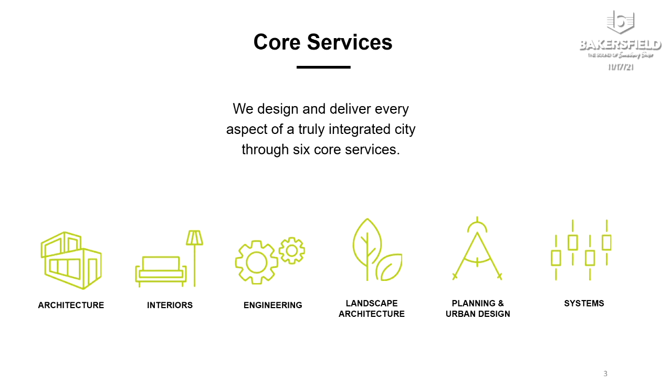Some background about them: IBI Group is a global organization doing projects all over the world. They're essentially urban planners and other design professionals. These are their core services. As you can see, we implemented and used all of these except, I would say, interiors. There wasn't any interior design work per se, but pretty much all the rest of these disciplines were used in the master plan. This is just a list of some of the resources they have available and the various disciplines they practice in.

And this is the team, the IBI team that worked on the master plan. The core team—we have with us today Dave Nicholas, who is the lead on the project and the project manager for the master plan, as well as Joe Clark, architect, and Jen Moore, who is an urban designer and licensed landscape architect. And with that, I want to introduce Dave to come up and take it from here.

Thank you, Stuart, and hello, Mayor and members of the Council. It's Dave Nicholas, IBI Group. It's a pleasure to see you. Thanks for the time today. We'll try and be brief. I wanted, on behalf of Jen and Joe and myself and the entire IBI team, to say thank you.

Thank you for the honor to participate in this process. It's been phenomenal. It's hard to believe we've done it entirely under COVID protocols, but that's a testament, I think, to the city staff, their endurance, their dedication, and our ability to have meetings technologically and virtually. It's been a tremendous process. We wanted to mention this is an amazing investment you're making in your community with this process. Streetscape enhancements are typically looked at as beautification, maybe not critical, but we see this as very critical to the livability, the economic vitality, and the image and identity of the city in the long term. We believe this document and this master plan lays out the groundwork for that to be applied over time.

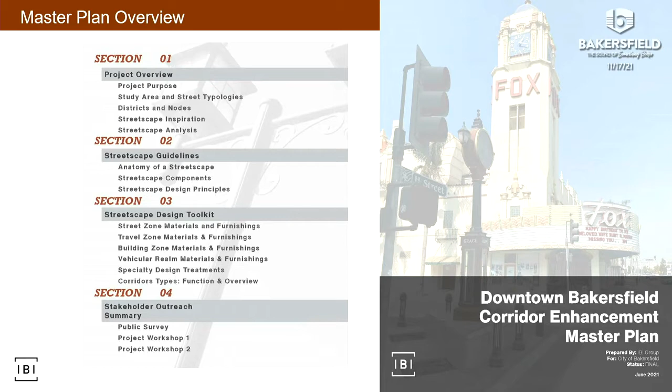The overview is what it is, but sections 2 and 3 are really the guiding principles as well as the toolkit we want to move forward with. Again, this is an abbreviated presentation of the information in the document itself, but the purpose really is a continuation of the Making Downtown Bakersfield vision. This is an outcome of that, and it's a next step in the image, identity, beautification, and corridor enhancements of the downtown area.

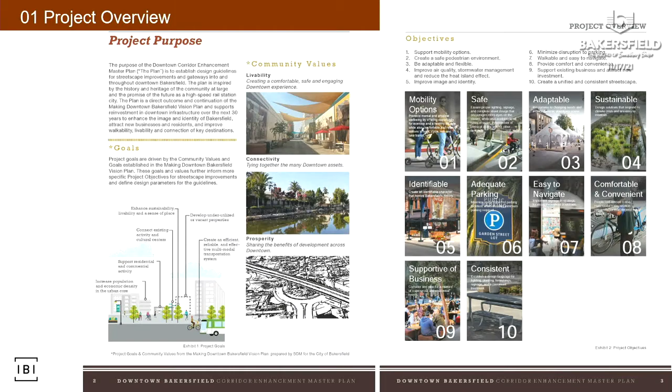So the goals and the community values that were established in that Making Downtown Bakersfield project are the leading, guiding goals and objectives of this project. And then we dove deeper through workshops and staff input and defined project objectives for this particular project. Those range anywhere from comfort and convenience to consistency and so forth.

We also leveraged that Making Downtown Bakersfield plan to emphasize and continue to look at this idea of districts and nodes in the downtown area. Those are emerging, and they always will over time, but that's important to recognize. You can let the streetscape and corridor enhancements actually reflect these districts and nodes, and they can take on a special character in those particular areas.

There's inspiration behind this to make this Bakersfield. So the heritage and history of the community is really brought into the design components in selecting materials, standards and patterns and so forth. The music, the agricultural, and the railroad history is all brought into this and is reflected in some of the guiding standards and objectives, as well as the applications.

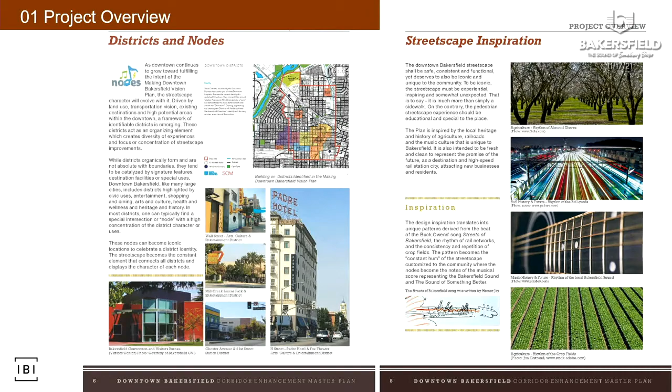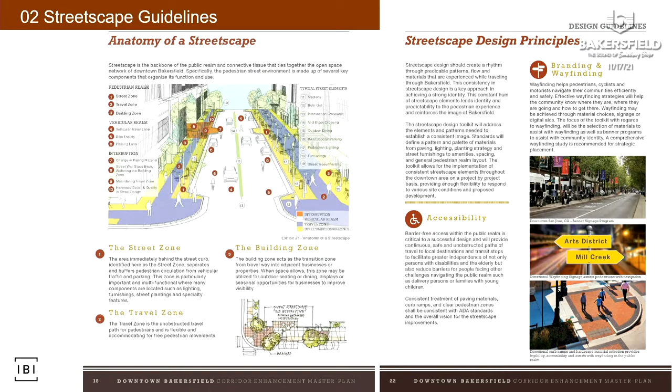Section 2 is really about guidelines. It defines the anatomy of a streetscape. It's not just the sidewalk, we know it serves so much more. When we boil it down and simplify it into a street zone, travel zone, and building zone, just to make it as simple as possible to understand. Then we define each one of those, what goes in each, and what the principles are behind each one and the functionality.

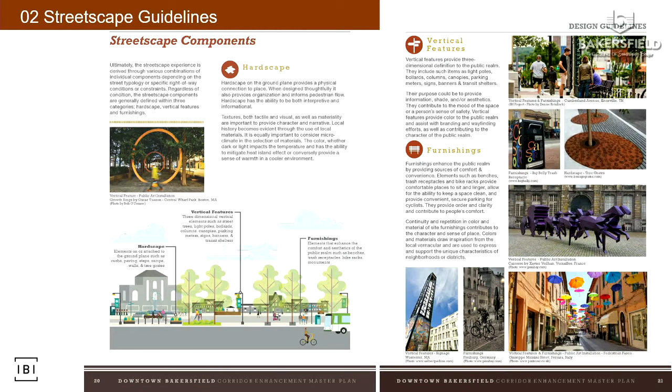We define the components of streetscape, and in this case there are 3 main components we highlight: the hardscape, which also defines the softscape; the vertical elements that become the 3-dimensional aspects of the spatial relationships and experiential qualities; and then the furnishings, which really add the color, creature comforts, and attractiveness to the environment.

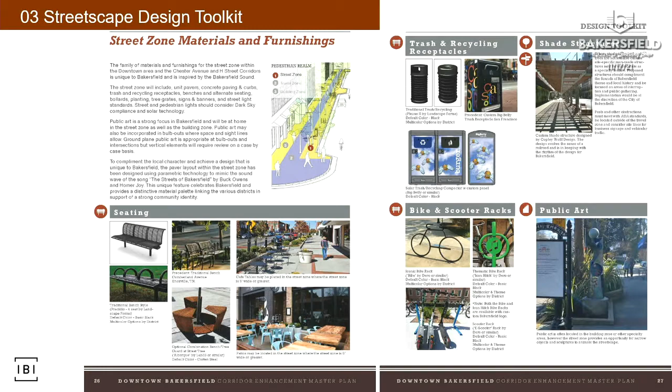This is just one example of the design toolkit, and this is the street zone. The street zone is the area between the back of curb and the travel zone, and it's really the most complicated because it serves the most purposes. It can include seating and furnishings, public art, street trees, lighting, and so on.

It also defines typical appropriate and applicable standards for paving patterns and materials. In this case, to customize it to Bakersfield, we looked at music and the sound waves of music and the sounds of Bakersfield to inspire a paving pattern in that street zone. The idea is to standardize it, so there's a constant hum throughout the pattern of the streetscape in the downtown area, but customizable so that it can become known as Bakersfield.

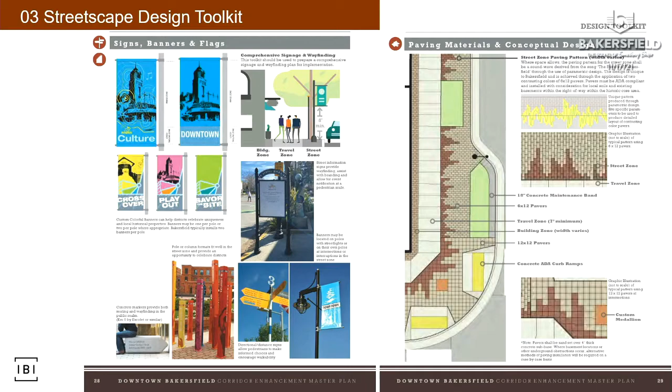The plan also includes a significant component of planting design, with important components to environmental quality built in. It defines a streetscape palette of plant materials and where those should be applied. There are significant components here from a water conservation standpoint, making sure we've taken care of soil conditions for great growing conditions for long-term health, and looking after the urban tree canopy as best we can.

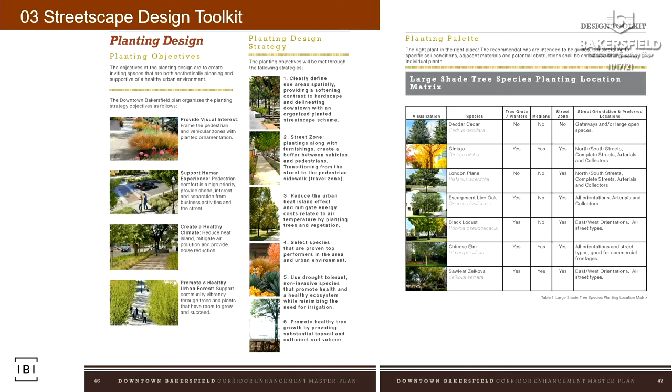The plan looks at typical corridor treatments, street tree planting and pattern, and how the arrangement of those should be applied. Again, these are flexible, since we know site conditions or development proposals can change each condition, so there's flexibility built in here.

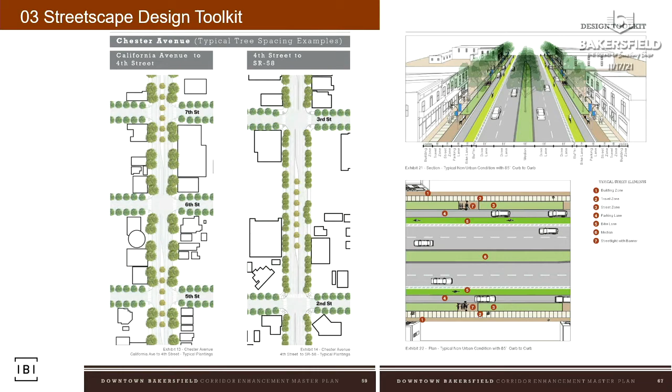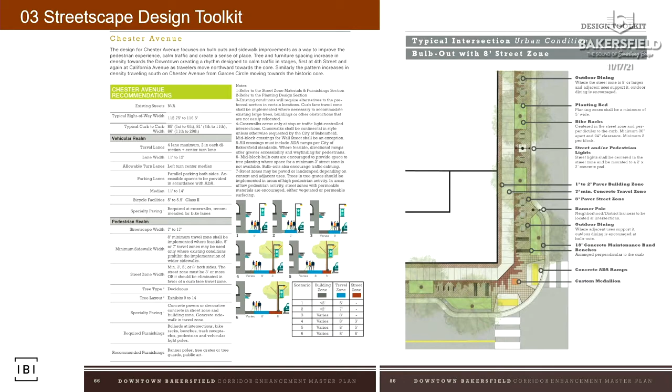The street tree pattern is one thing to think about. We've identified zones of street tree patterns and where they relate to land use patterns and street patterns as well. For each kind of corridor, there's a cut sheet of typical treatments for the vehicular realm as well as the pedestrian realm. These are the standards laid out so designers and engineers, as projects come down the line, can follow and apply them as appropriate, looking at samples of urban conditions as well as non-urban conditions for bulb-outs at intersections and so forth.

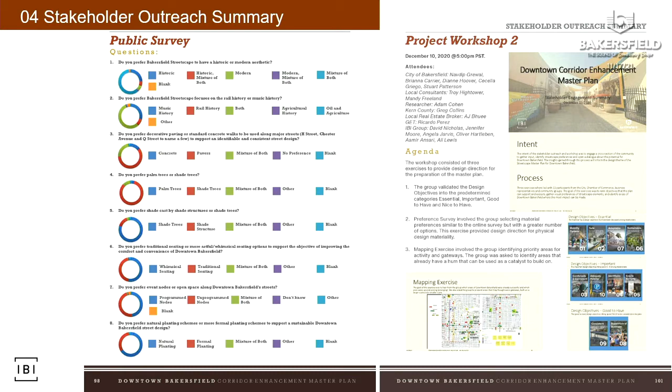Just wanted to touch quickly on the public outreach. That was an extremely fun and rewarding process for us. Anywhere from online surveys, you see on the left, we had several public workshops with stakeholders and city staff. There were almost 600 responses on the online survey, which we felt was tremendous input. The workshops were very interactive online, but provided a lot of great direction.

Just a few miscellaneous things that the document covers. Again, public art we know is very important to the DNA here, and we also think it's a very important part of the public realm.

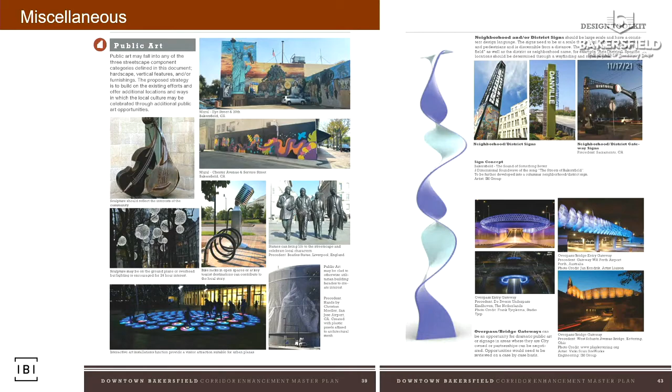So the investment in bringing in public art, or at least encouraging public art as a part of this process, was important. Signage, wayfinding, monuments and gateways are covered in the document, as well as things like pocket parks and plazas where potentially there's some public land along these corridors that could be turned into key community assets. On the right here is the street tree component, relating street tree rhythm to the actual streetscape layout and grid pattern in these zones, creating different zones that we apply different street tree patterns to. So again, very rhythmic, thinking about pattern and the overall context.

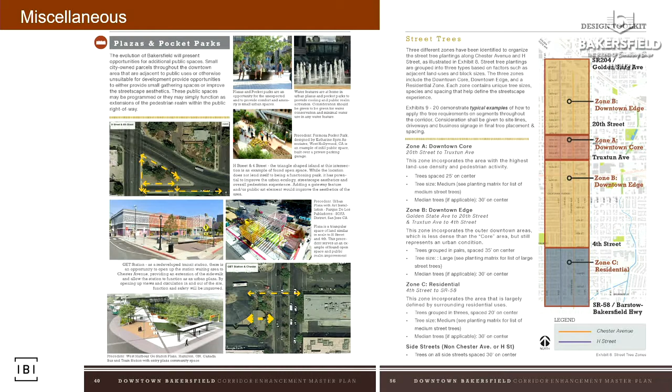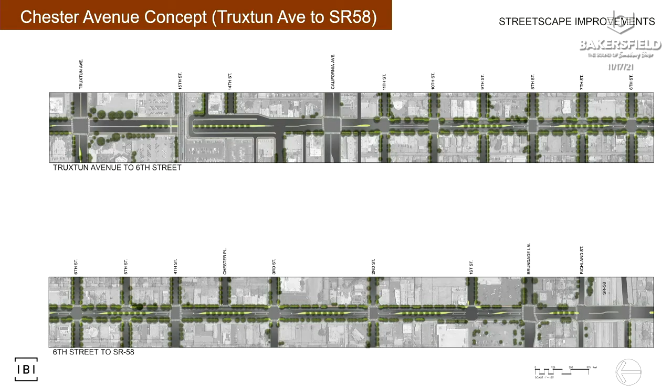In addition to the master plan, city staff asked us to apply these guidelines and standards to the Chester Avenue and H Street corridors from Truxtun to SR 58. So we went one step further in this process. We actually took the document, and as designers and engineers, applied these as we felt appropriate in that corridor. We don't need to go into the detail of these, but this will be the next step as we look to implement these standards and guidelines in enhancement of corridors. So that was Chester, and this is H Street from Truxtun to SR 58.

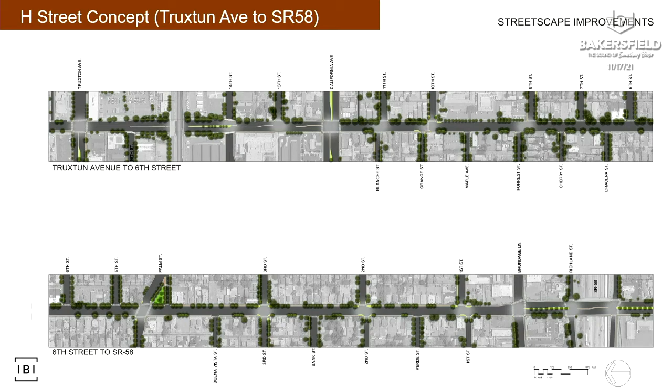So again, we want to thank you for the honor and opportunity to participate in this. We're excited for the next phase, and we can't wait for it to come to fruition. Again, a great guiding document for the future of the community, adding value from a livability and economic sustainability standpoint. So happy to answer any questions, or Stuart, if you want to add anything else.